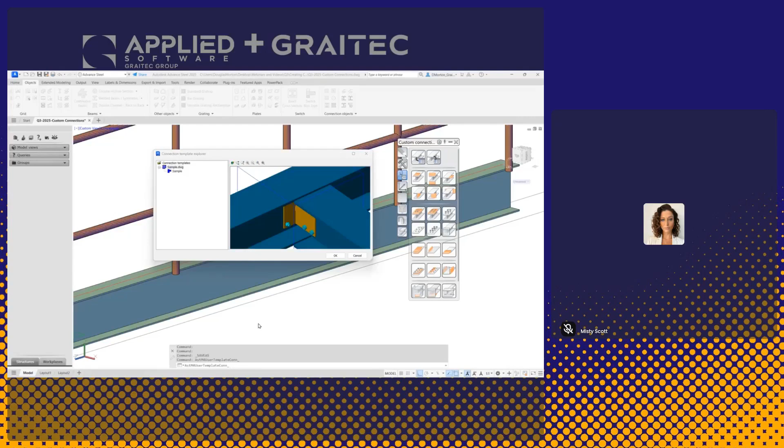We're going to take a look at how we can create a custom connection. The custom connection itself is found on your tool palette, which if you need to open that up, you go to the Home tab. It's right here, Advance Steel Tool Palette. If you come down to the third category on the side, you'll see Custom Connection. And we're going to look at how to create and use a custom connection.

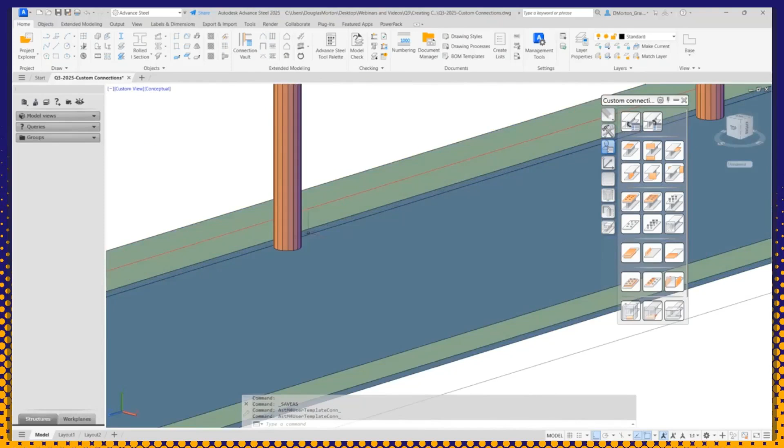To start off with, I'm going to build something similar to this. I'll show you how I did it. And then we're going to turn that into a connection. So I'll take this one here, and I'm going to start by going to 2D wireframe.

I want to build the sleeve that this is going to go into. So I'm just going to draw that in. Circular hollow section. I'll pick a point. I want it to go up, and I'll make it 6 inches long. That'll come in. I pick the size that I want for my sleeve.

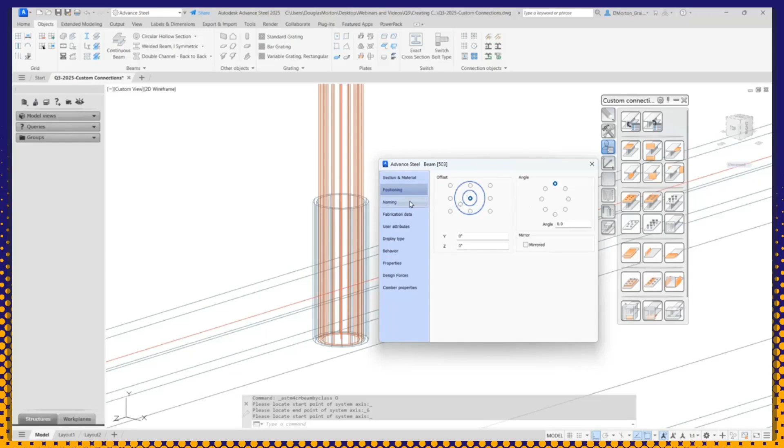Okay. Any other variables I need to set, and let's see, they have a railing pipe connection. That's good enough. So we'll put our information in. We have our part there.

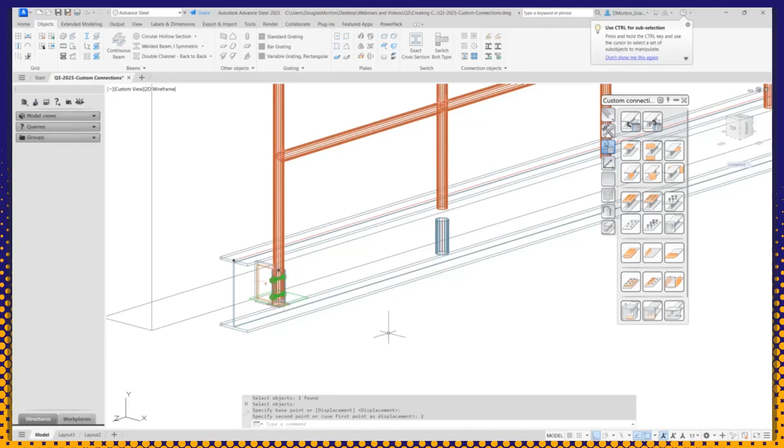Now I need to move this down a bit, so I'm going to move this down, let's say 10 inches. See if that's the right height. That's probably too much, so we'll move it back up a bit. Let's say 2 inches there. Yeah, good enough. So now I have my sleeve down underneath the flange, and I want my rail to come into that. So we're going to continue to build this.

I want to have a plate that comes off of this going to the web of the beam. So I can come into here and I can use, in the custom connection area, they have tools for plates. Now, whenever you're creating a custom connection, it's probably better to use the plate tools from here if you can, or the tools that they provide here if you can, simply because these tend to have a reference point and they tend to be more dynamic if things get changed.

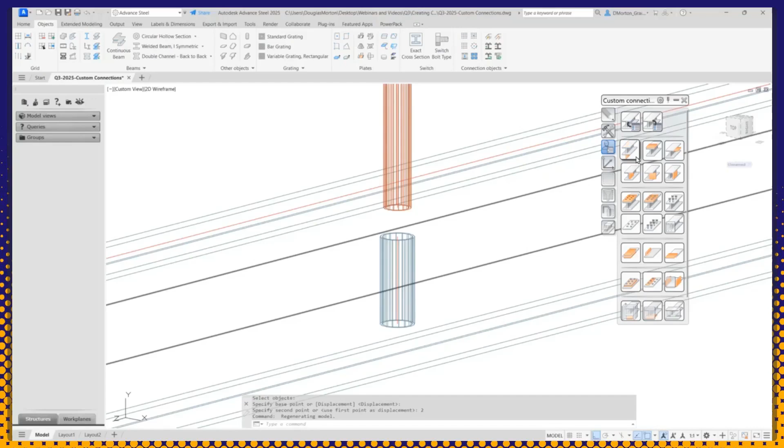So I'm going to select the plate here and pick the sleeve that I just created. It says, do you want to select a reference point? Yes or no? So I'll say yes. I'll just pick the center point at the top here. That's fine. That'll be my reference point.

Now, if you don't, it's not the end of the world. You have the ability to go in here and you can say, I want the main system line or main physical line to be my reference. It'll work just the same.

At this point here, I want this not to be parallel, but perpendicular. And I need it to go towards the actual shape itself, towards the beam itself. So you can see it's going to come off one side or the other side. So what I'm probably going to have to do here is just rotate this 90 degrees one way or the other. So it's looking at the orientation of my shape and basing it off of that. Okay, so if it doesn't line up initially the direction that I want, one side or the other side, I can always rotate the main shape that I'm attaching to, and then it'll come out this way.

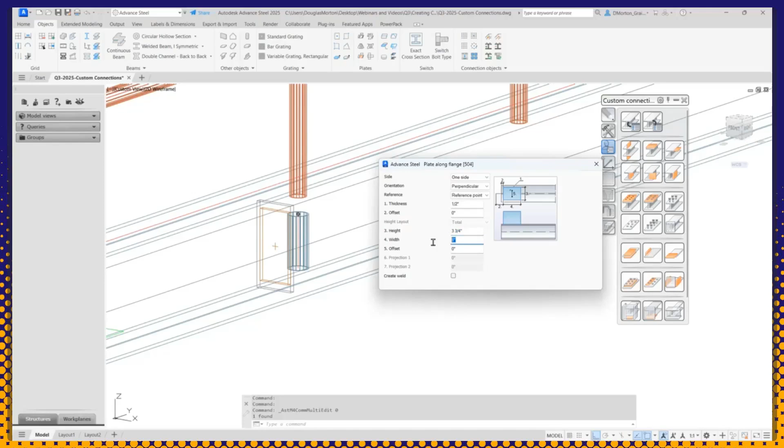I'll go back into the settings for that plate. I'm going to make this height 3 3/4, and make it towards the web, then make the width 6 inches. So that gives me the plate going in towards that beam.

I can set the thickness to something else if I want. I have the ability to come in here and create a weld that'll weld the two pieces together, the plate with the sleeve here. I also need to add a weld on the other side, but that's not going to be part of this menu.

But you have other controls in here as well with an offset. Depending on what tool you select from the custom connection area, you'll get different variables and different tools that allow you to set up that object.

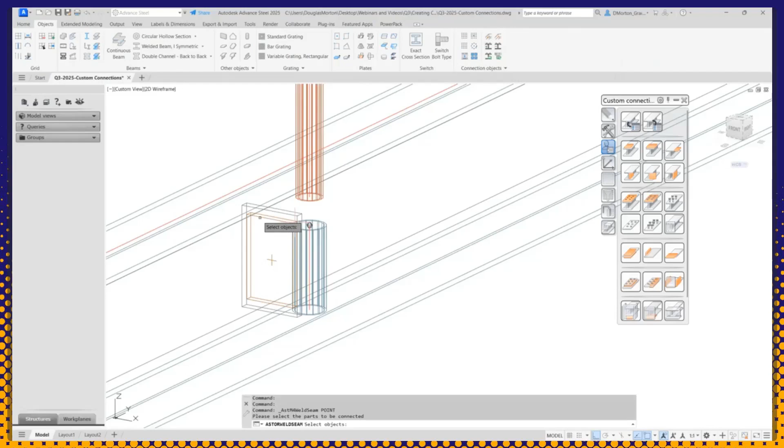So I'm going to come here and just add in a weld. I'll take a weld, and say I want to weld that plate to that beam. I'm just going to put it on the inside near the middle, shop, and continue this all around. I can set notes, do whatever I need to, and that's just from the weld command from the objects tab.

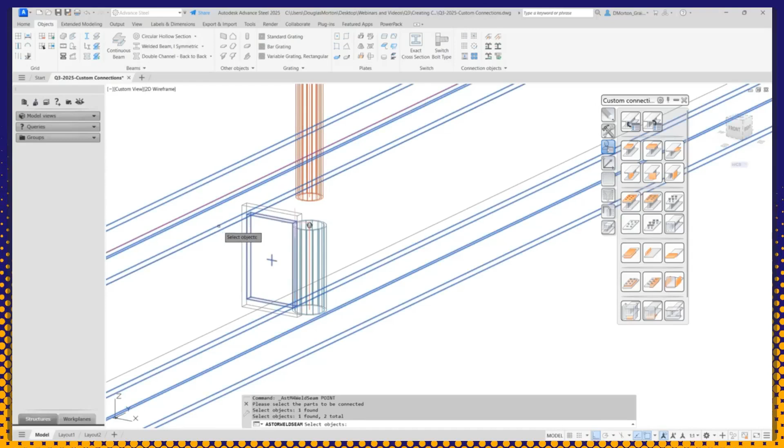So it's going to recognize those two parts if I select them both. I'll pick both like that, then pick the weld, and say what I want it to be.

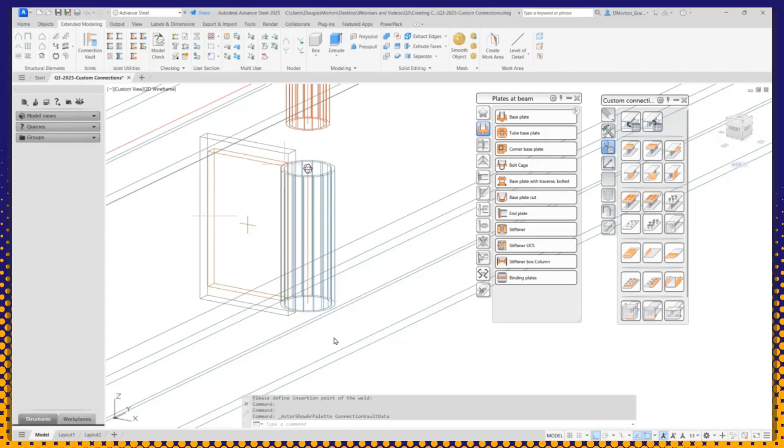At the same time, I want to put a cap plate at the bottom. So I'm going to come down here and use my connection vault. Yes, we are creating a connection, but connections can be part of the connection - that's not a problem. So I'll come into here and say I want to place an end plate near the bottom.

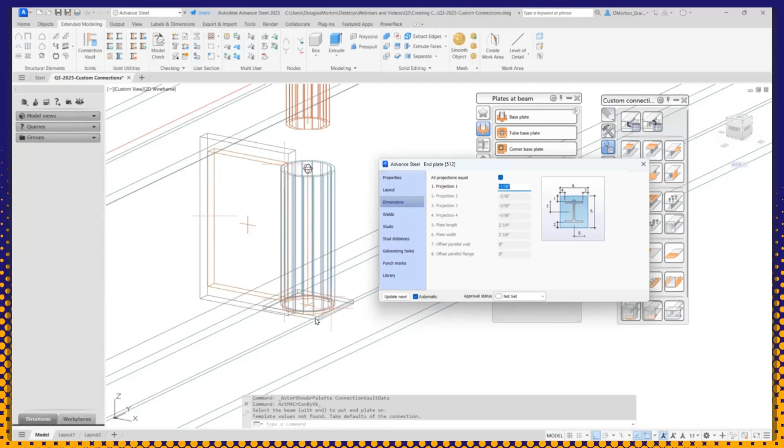I'll just go quickly through this. I don't want it to be 1/2 inch, let's make it a little bit thinner. And I want it to be round. Okay, the dimensions - maybe I'll pull it in by 1/16 of an inch, so that way if we're welding it, it has a place to grab to, and we're good. Okay, so there's my cap plate.

I can also extend the pipe down now. So what I need to do in the dialog for the handrail - if I have no connection here, I can't extend it, but I can still use my tools here, and that can be part of my connection.

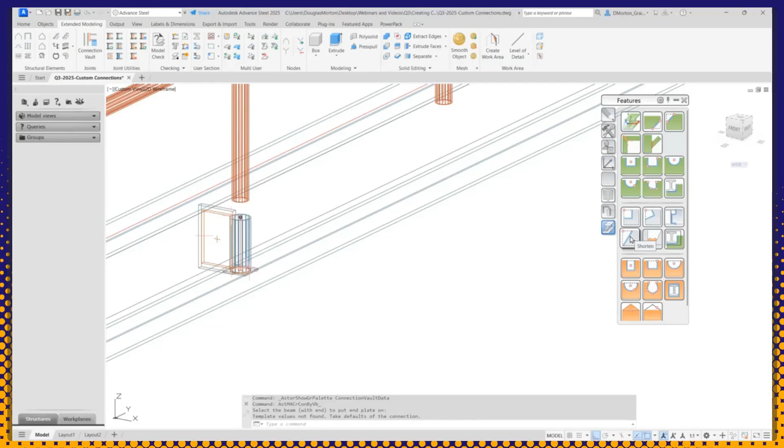So I can use my feature cuts from my tool palette, use the shorten command on the handrail, and then set it to a negative value so that it lengthens it rather than shortens it. You can see I pushed it down 7 inches so that it's now inside the pipe, or inside the sleeve rather, and it's going through there.

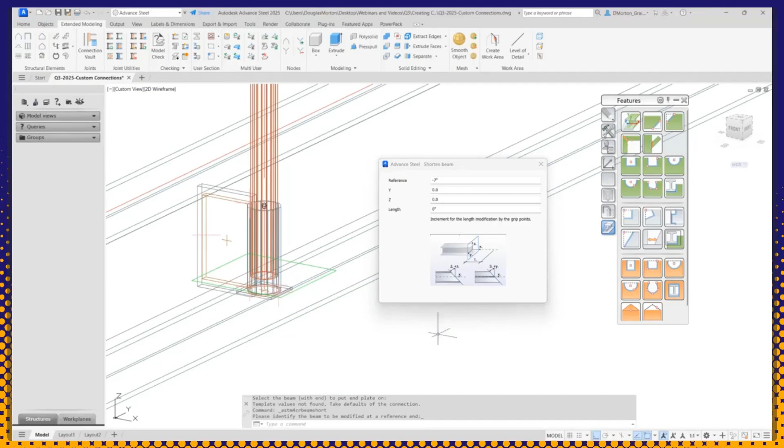From here, I want to put some bolts. So I can come back to my Objects tab, make sure my switch is set to bolt. I'm just going to take the rectangular center point one, and pick both the sleeve and the pipe, then put it right in the middle of that sleeve there. You can see I have my UCS set the wrong direction, so I'll just go back, rotate around the X, and then do it again.

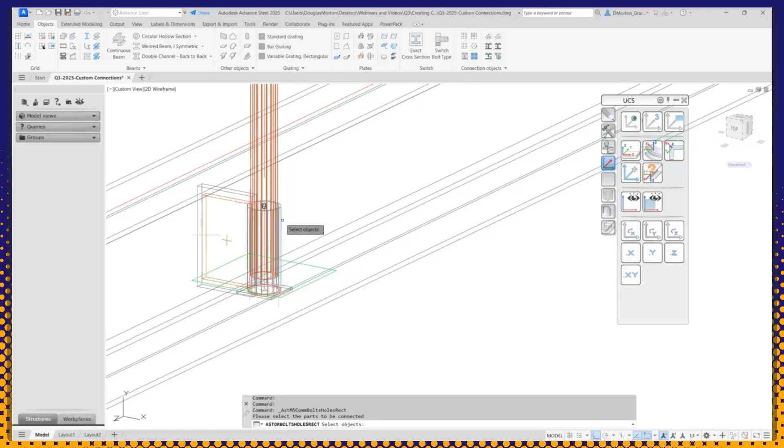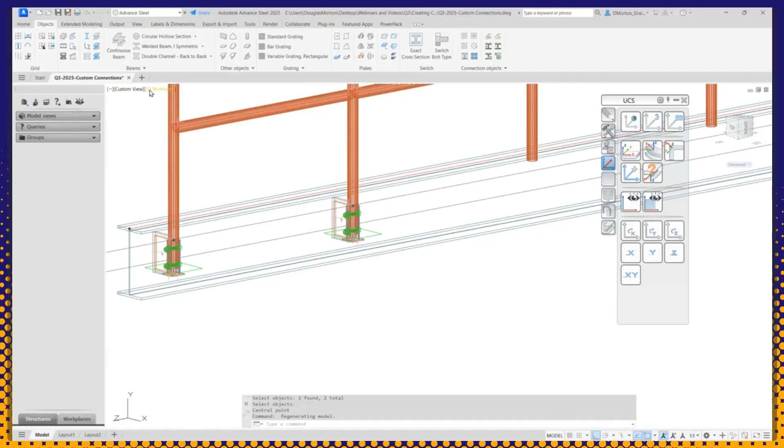Now, once you have everything in place, just double check and make sure it's the way that you want it. So let's say I have my plates being fastened to the side there. I've got the bolts going through both the sleeve and the handrail. I've got the cap plate at the bottom. Let's say this is a connection that I want.

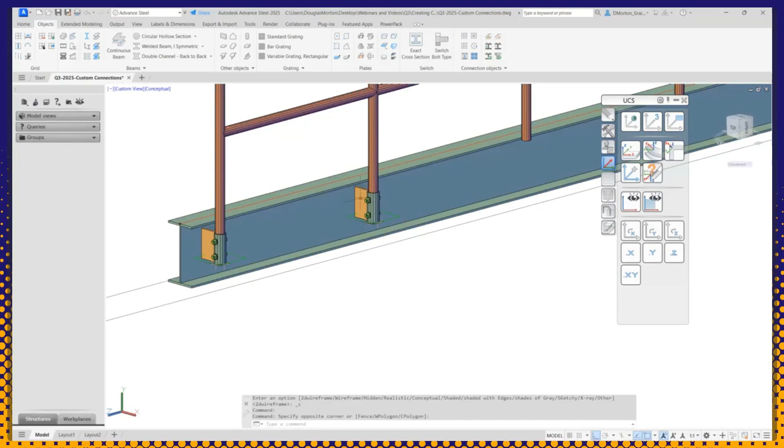How do I create the actual custom connection now that I can use over and over again? You don't have to, but you can create different connections if you want - maybe I wanted 3 bolts, maybe I wanted 1 bolt, maybe I want a different plate. I can just continue and make a whole bunch of them in the same drawing. That's not a problem, but I would create different connections for each. So what I'm about to do here, I would create a different connection.

Right, I would just come up here, and on my tool palette, that third category down, you're going to see you have custom connections. The very first button is going to be to create a custom connection. Click on that. You require shapes in order for this to work. There's no other way to do this.

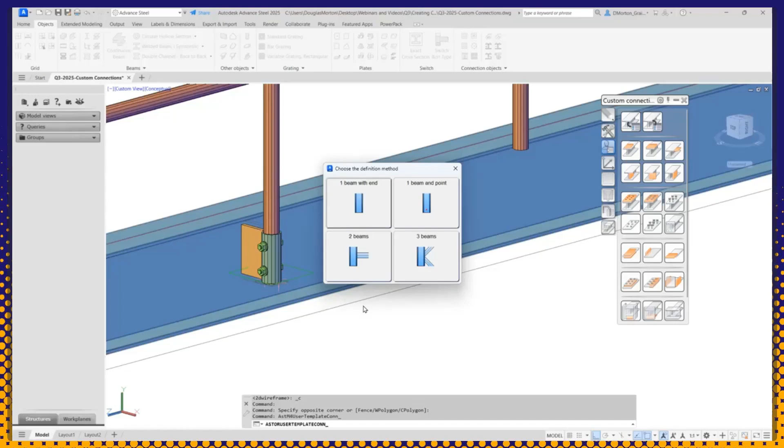So I'm going to come in here and say, am I attaching this just to one beam? No, I'm not. I'm actually attaching it to the beam and the post. So I want these two as my main parts so that whenever I want to place this connection, I have to select those main parts. Okay, so I have to pick two beams.

This would be what I want for my first one. Select the beam going across, then select the post, and right click. You're going to see this dialog comes up, and we're just going to fill this out from top to bottom.

The name area in here, this is going to be, for example, rail by side connection 1, if you want. Call it whatever you like.

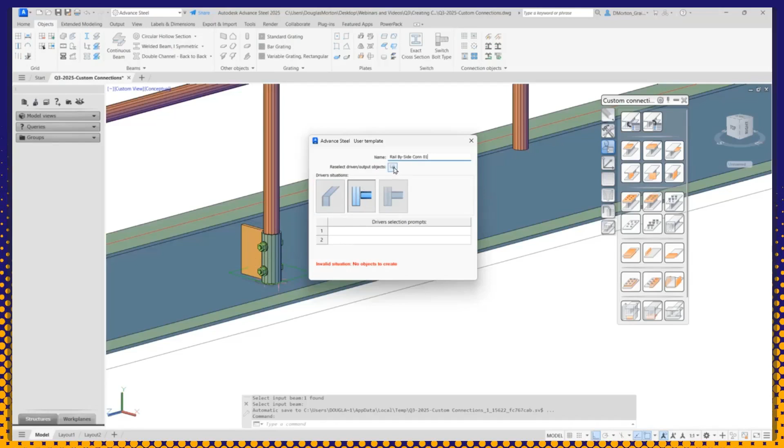Select the parts. Now you want to make sure that everything's showing, your welds and your feature cuts and stuff like that. You want to make sure everything's there visible so you can grab them. So you're just going to say reselect the output objects. You don't have to do the beam and the post, so you can just go around the objects that are added into that connection, and it'll pick those items.

And right click. You'll notice that the minute you reselect objects, the items you've selected, you end up getting a connection box, a blue box around it.

You then need to decide what kind of situation is taking place. Do we have beams that are going end to end or shapes end to end? No, that's not the case. Are they going flush, one right up against the other one? They're not. This says it's coming into it, but it's not touching it. It stops at the flange edge, which will work in this situation here.

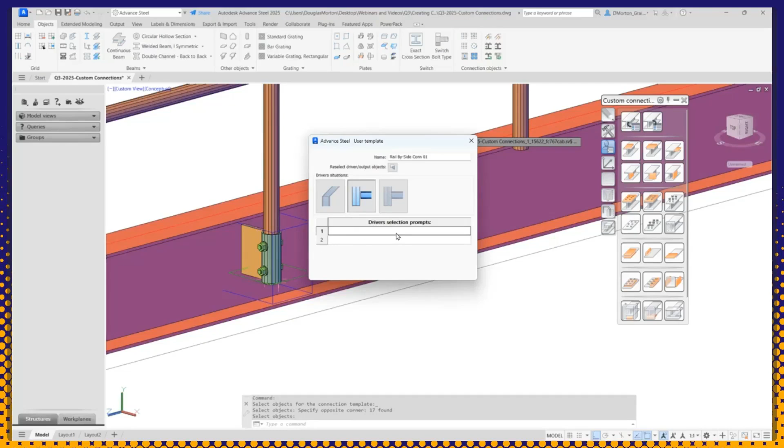Then we're going to fill out the bottom. You notice when I click on that first box, the beam turns red, and it just wants you to describe what this is. So I'm going to say beam, and then I'll come to the second one here and say post.

So that describes the post. So now when it prompts me to select my objects, it'll say, please select your beam, please select your post. There is no save or apply. Once you finish filling everything out, you can close it.

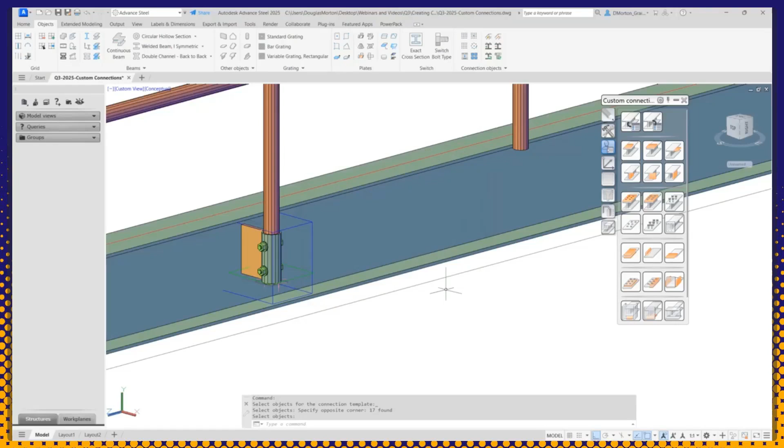The key to this, however, is after you've selected your objects and you see that blue box again, you can do another connection here, another one here, or you can go create other connections off to the side. It's not a problem. You can have as many as you want in the one DWG file. But when you're done, you're going to save it to a specific location.

So I'm going to start off by coming into here. I'll do save as, and I'm going to navigate to my drive C. I'm going to go down to program data. This is a hidden folder in Windows. If you don't see it, it's because it's hidden. You have Autodesk, the version of Advance Steel you're using, your localization.

And once you get into your localization, basically you're coming up to this point here: program data, Autodesk, your version of Advance Steel, the localization you're using. Now you're going to go to shared, and you'll see there's a folder called connection templates.

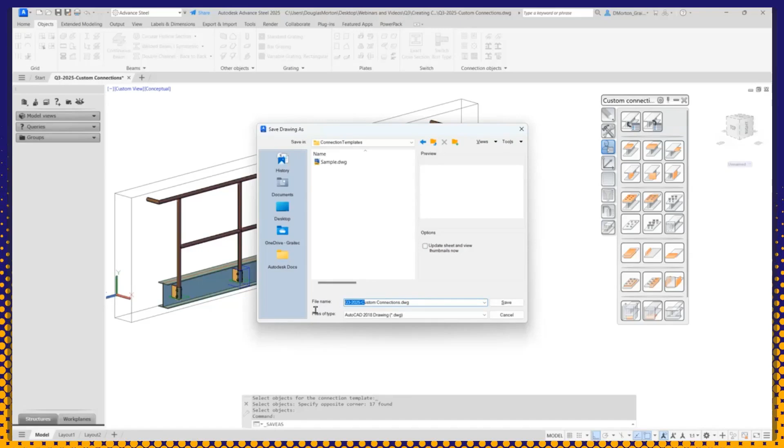Go into there, and you're going to say, what is the name of this connection template, right? So in here, I'm just going to put, whatever, I'll call it, give it a name. Custom connections, it's good enough. Save.

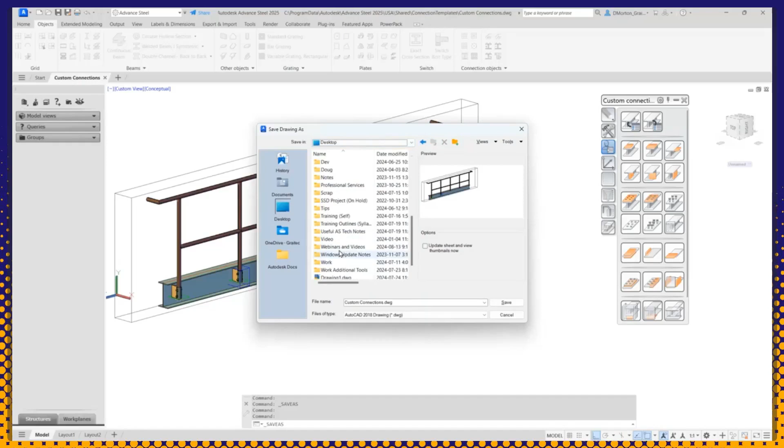Now, because that's saved there, anytime we go and we want to use it now, I'll just save it again in a different place. We'll get rid of it. So I'll show you, let's see, desktop. I have my work done here. I'm just going to go into that and save it here. So save.

I can get rid of these elements now if I want. I'm just going to get rid of the connection—actually, it's not a connection yet, but you can do that and get rid of it. You can see I have nothing connecting that handrail to the side. But I can come into custom connections, same place as before, my tool palette, third category down.

When I come up here, I have the ability to use the insert connection template. If you've saved this to the connection templates folder that we looked at before, inside where you have the program installed, then any connections you have in that DWG will be listed here. And there's the one that we just created.

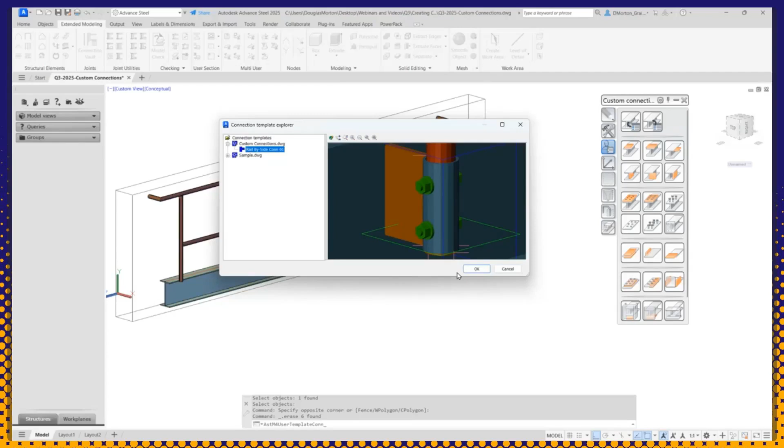I'll say OK. You'll notice the tooltip right away says select the beam, so I'm going to pick the beam. Then it says select the post, and I'll pick the post. And it places that connection in.

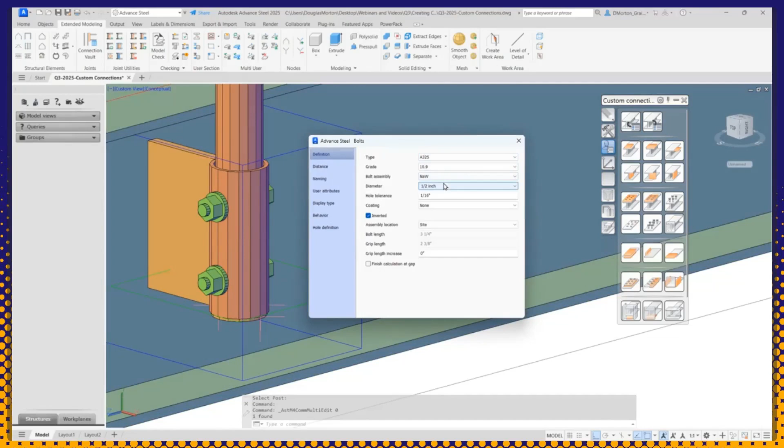I can allow object modification, which means that now I can actually go in and adjust things. So maybe I didn't want a 1/2-inch bolt, or maybe I didn't want an A325, or I wanted something else—I can go make changes to that. I can select my cap plate, and here there's my joint properties for my cap plate. So even though it's a custom connection, I can still make changes to the elements that are in it.

So if I've used bolts or welds or cap plates or anything else, I can still make changes to it. If the parts are drawn manually, I could adjust those as well.

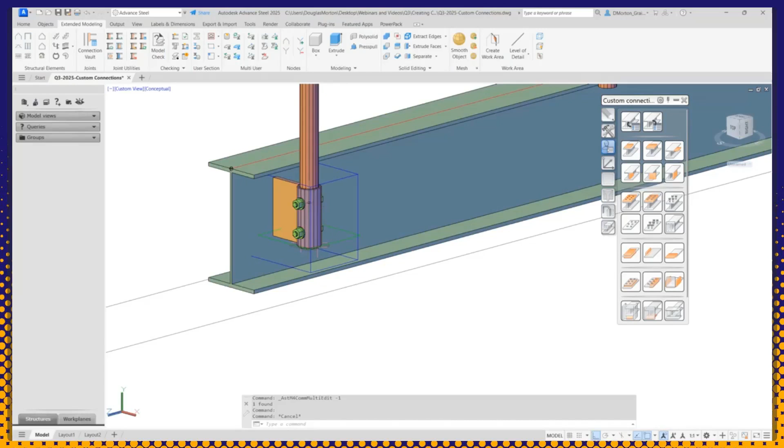This sleeve, this connection here, if I want to use it on the rest of them, it's used similar to a regular or standard connection. So you can go in and use your connection tools. You'll see they have the standard connection tools where if I wanted to copy or create a similar one, I could come in and grab that, pick my connection.

Right click, I'll take the beam and the post, and you can see it's going to put it on there. There's no box, only because it's a refresh issue. So if I refresh the view all, basically the box will come in, and I have that connection there.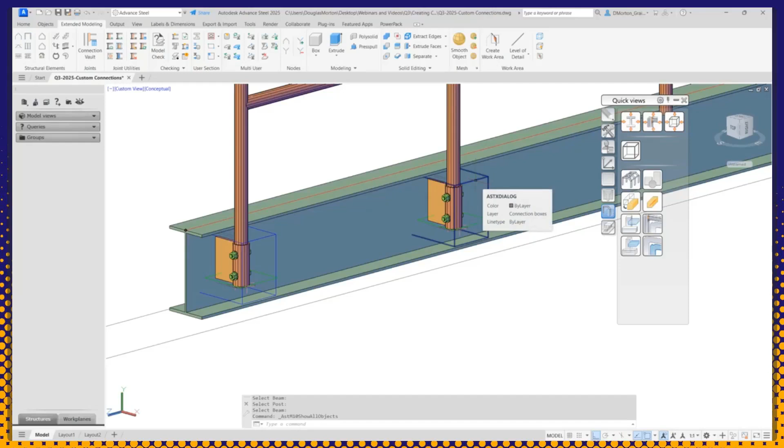So I can use my connection copy tools to bring them across. Let me get rid of that.

I also have the option to use the other one, where it's a joint connection. So let's say I want to do all the rest of these handrails. I can select that, pick my connection, right click, pick my beam, right click, and then select all my other posts, right click. You'll notice that it copies them all down the line.

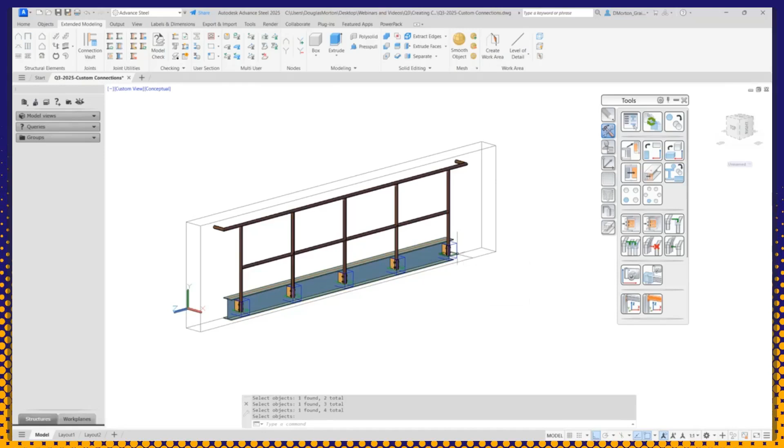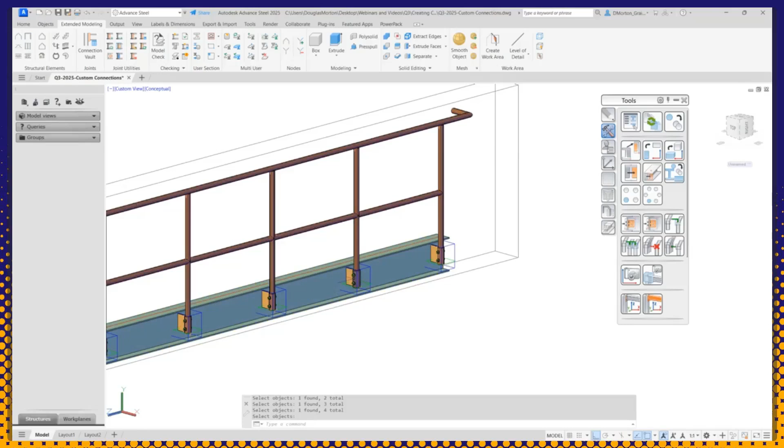Now, in some cases, depending on the handrail, you may notice that the final post is rotated. If you do, just don't put the connection on there. You have two choices: you can go in and create a new connection, one for left, one for right—that'll work. Or you can do all of them as a joint connection and then just do this one separately.

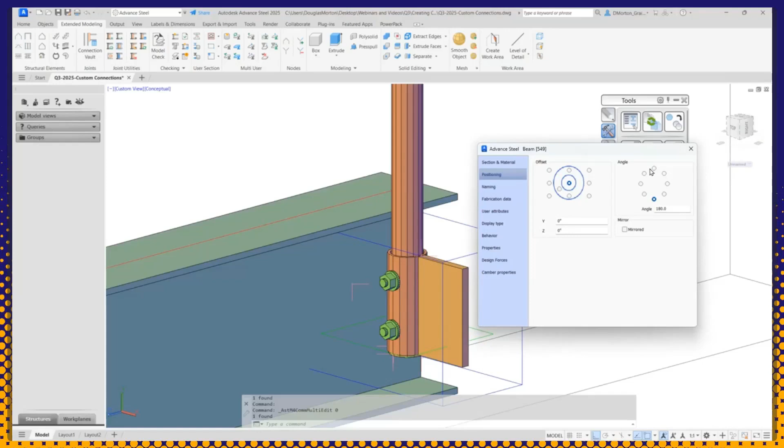When you go into here, that's going to be a primary connection, but you can allow object modification on that separate one. Then you just come in—don't forget you have access to everything—and you can change the positioning of that connection to the other side. So you can rotate that part that the plate is attached to on the other side, and you should be good to go. Just be aware of your weld.

Make sure that it's welded up properly. But that gives you the ability to rotate your connection after the fact, depending on what you've attached and how you've attached it.

You're also going to notice that in this case, I made these a joint connection, so if I do that to the one, they all get affected at the same time. So the joint connection works—it creates that joint connection and allows you to modify several connections at the same time.

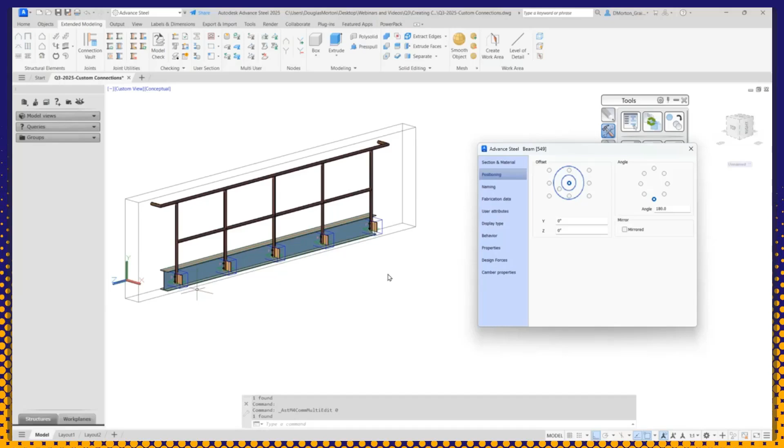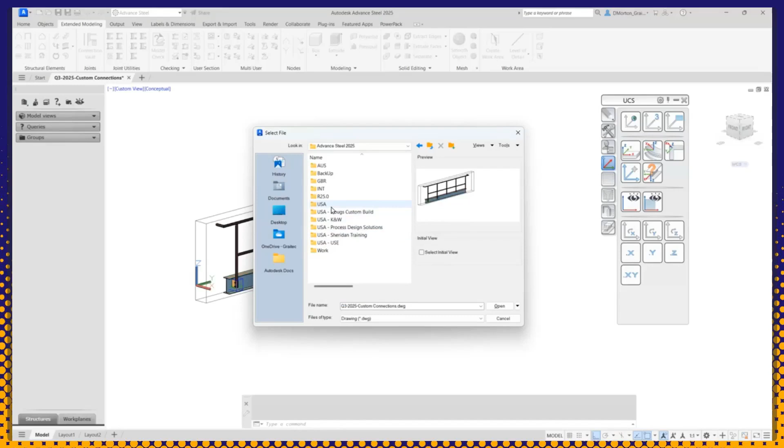I'm just going to go back now. I'm going to reset my UCS here and go back into the one that I created before. That's being saved on drive C, program data, Autodesk, Advance Steel, USA, shared, and connection templates. I'm going to open up the original one here.

I'm going to create a different type of connection just to the side quickly so we can see a column and a beam as an example.

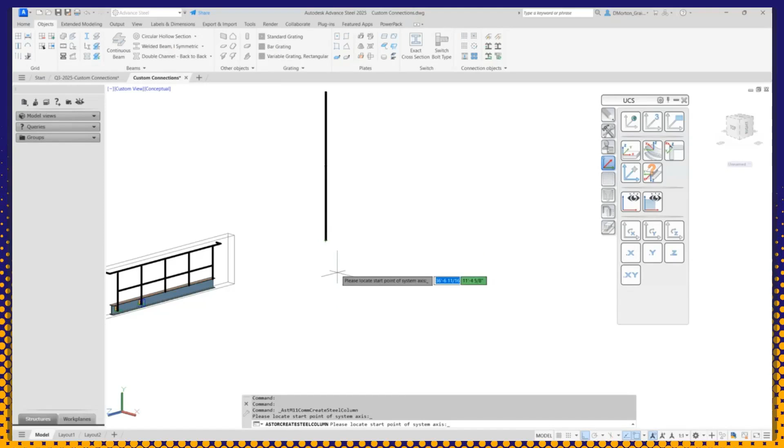So if I come in here and I place a column, I'll put that off to the side, and I'm in the same drawing, same DWG. I'll change the shape to, let's say, I-section, W shape, and the default's usually a 12 by 26. We'll use that, that's fine.

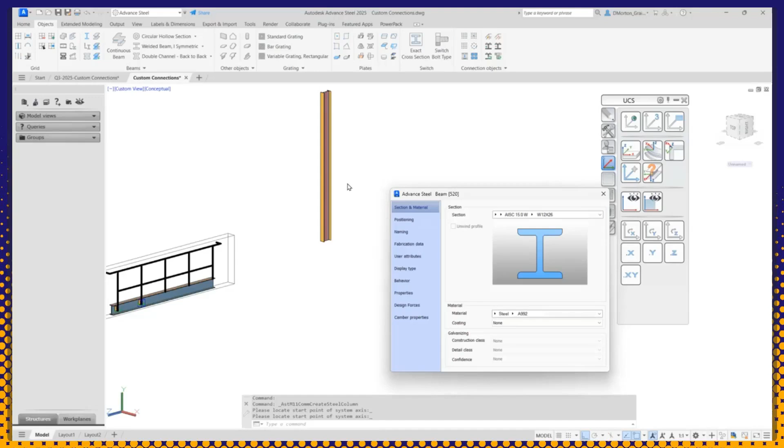So I have my column here, and I can set that however I want, whether it's facing the web or facing the flange sticking out, and then I can build off of that. The one important thing about this is that you build it the way you would typically build it. So if I'm putting the column in by center, so I have that system line in the center, then when I'm making the custom connection, I should do the same thing.

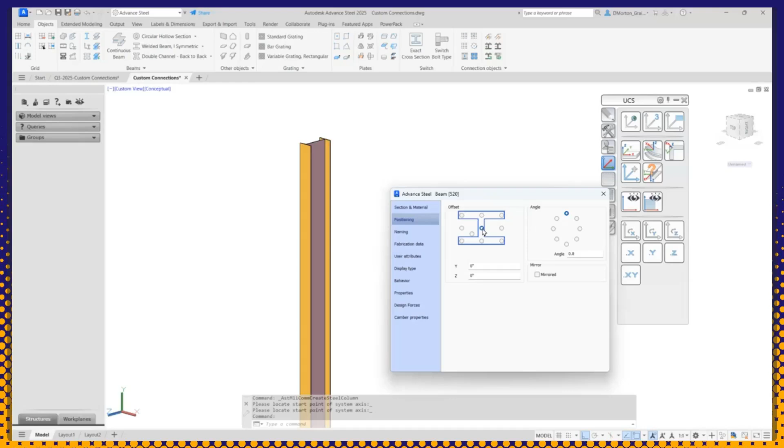Otherwise, when you go to place it, it may not come out properly. So if you're doing beams by top of steel, make sure you put the beam by top of steel. If you're doing columns by center, put the columns by center. Not doing that and then trying to use the connection can cause issues. Just make sure you're inserting the shapes the way you normally would, especially your main members.

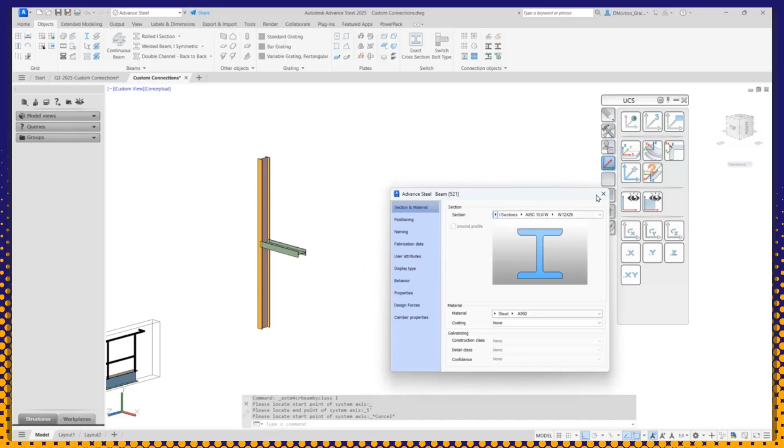Okay, I'm going to close that. I'll come back and do another one here, just going to draw in a beam coming off of it, like this. I'll put this as, I don't know, 5 feet. My UCS is rotated, so I'll do it again, just put it in properly.

And I'll grab that center point just to make it easy. Do 5 feet, and there I have a beam coming up. Now I want to connect this up.

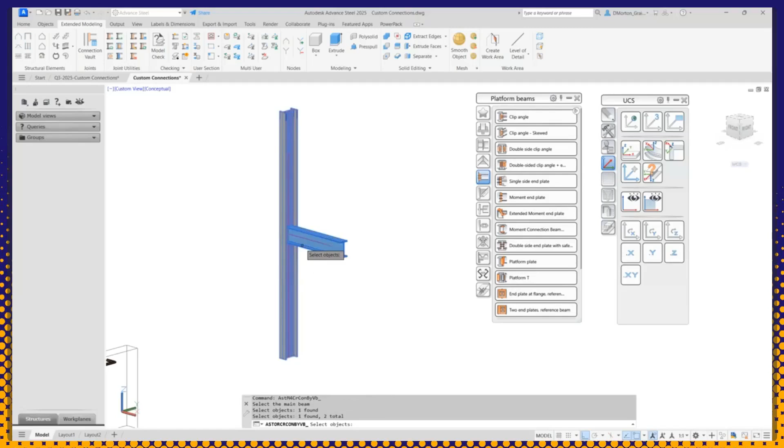Okay, I'm going to set this up, create my shapes. These are going to be my main elements. Now I'm going to use a couple of out-of-the-box connections again, let's say a clip angle. I'll select the column and then the beam, and I'll place a clip angle, just using the defaults. So I have a clip angle here.

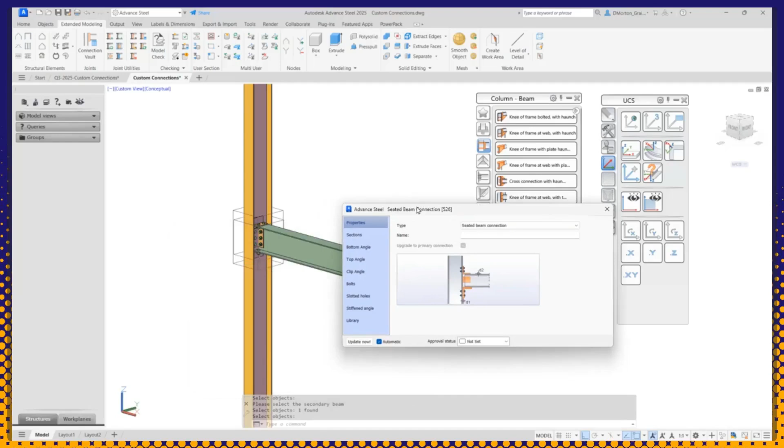Maybe I want that to be seated, so I can do a seated beam connection. Again, column, beam, and it's going to place that seated connection in. If I want it bolted through the top, I can do that. If I don't, I can say bottom angle through secondary, and the top angle through secondary as well. You can set this up so you have your seated connections however you want.

You have your clip angles however you want. You go and set the connections in, and it's very quick and easy that way. Maybe this is all you do and you just want to have it the same way every single time. You can set that connection up once and then go and use your custom connection.

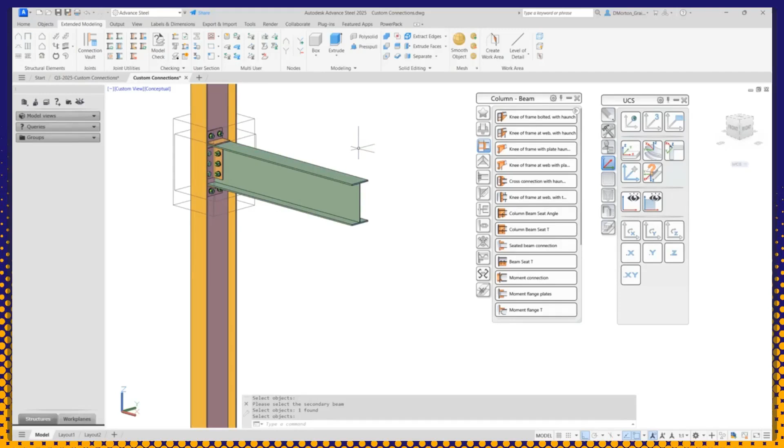I'm going to do a little bit more though. I'm going to put, let's say I have a pipe or something coming through here, so let's make a modification. There's an opening, I'll go like that, and here I'll come off of that a little bit, keep snapping the other way. I'm going to go to the wireframe to make it easier.

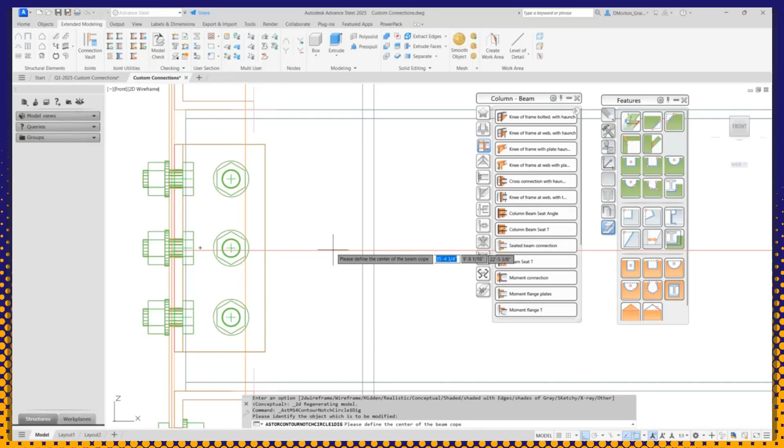I want to modify the beam. I'm going to come off of this, let's say from the center of the plate, a little bit. It's still going the wrong way. Okay, I'll do a line here. Oh, it's the UCS, that's why. Okay, try again.

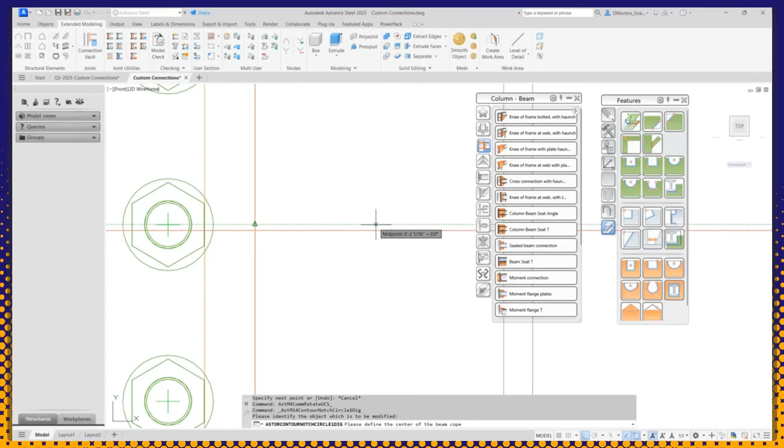There we go, now I'm getting my tracking 6 inches over. We'll make that 2 inches round or something, and there we have an opening.

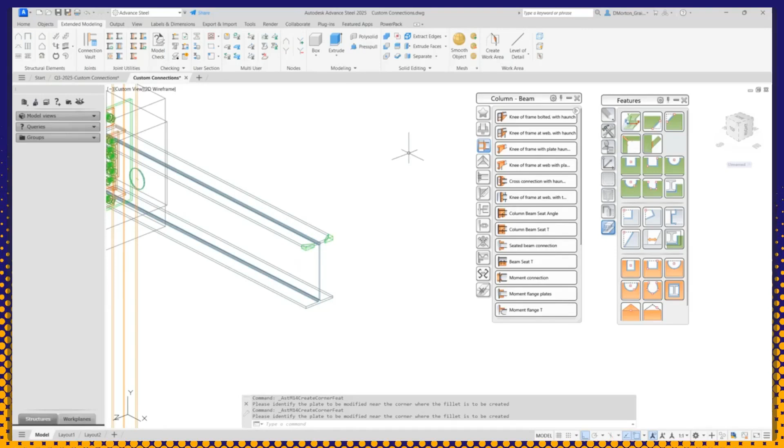I can come in, maybe I want to have some corner work done at the top or something, you know, I can chamfer the corners or whatever the case may be. I want to put a plate underneath here. I'm going to add a regular plate so you can see how this works and what the difference is. Let me just come into here, I'll reset it, there we go.

Now I can draw my plate, so I'll just do a regular plate here. I'll come in and do a nearest to the other side.

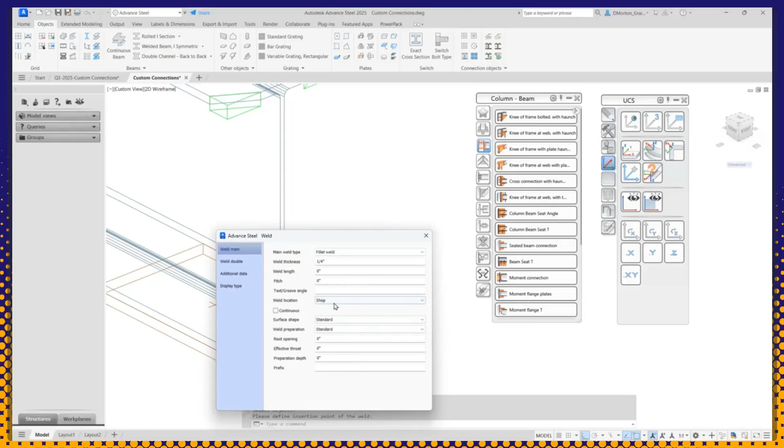And I'll put that like that so it's sitting underneath. I'll even weld it together here. So now I've got a weld, shop welded. And I'm going to put the regular custom connection plate that I was talking about before under there.

So I'll just pick that, I'll select my beam. Do I want to have a reference point? I can if I want. I can put it, let's say I want the top point here or something like that. I'll put it to the other side, so it's at the bottom, and I'll move it back a bit. So let's offset that by, I don't know, 8 inches or so, maybe a little more. 12, there we go. Okay. So that gives us...

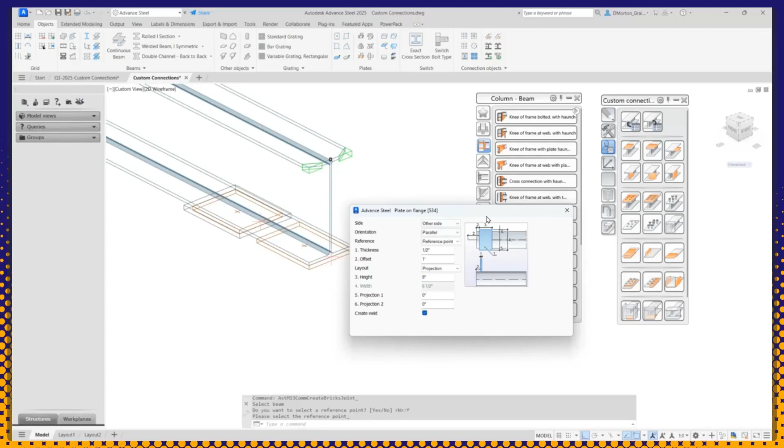A plate underneath, and I'll weld that one too. So one of these plates is drawn in manually, and one of them is using a custom connection.

Let's make a quick connection out of this. I'll create - again, it's 2 beams in this case. So just pick the parts that are the main parts that are always going to be there when you start. Column, beam, give it a name, right? Column, beam. Select the parts. So again, I'm just going to come across like that, pick all my parts.

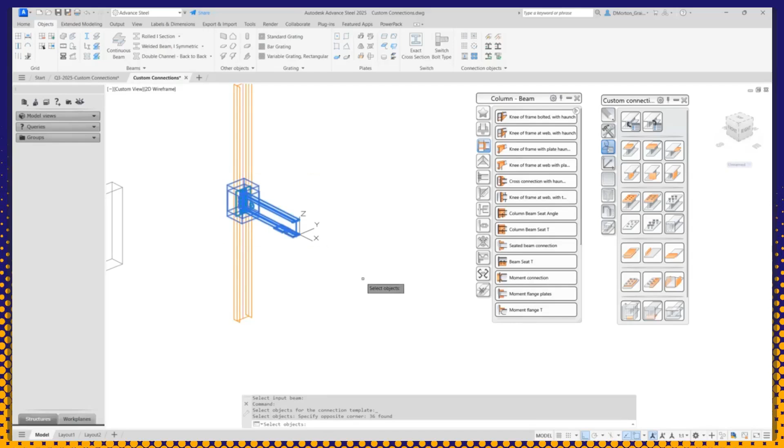And I get my blue box. In this case, I do want it coming flush to the other piece. My beam comes right in. I'll highlight that and say this is going to be the column, and highlight that. You can see that's the beam.

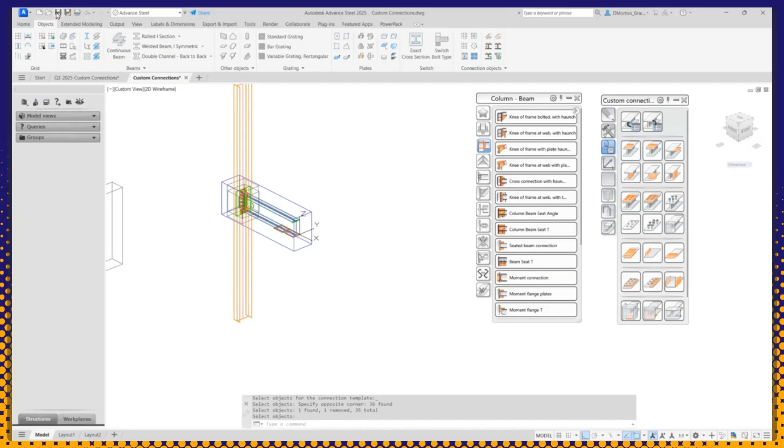Close it, save it. Now, this is already in the proper folder. We opened up the file from that folder. So I'm going to close that, and then I'll just place in a column and a beam here. We can see, now that I have that standard template, anytime I start a new drawing, I'm going to have the option now to add that in.

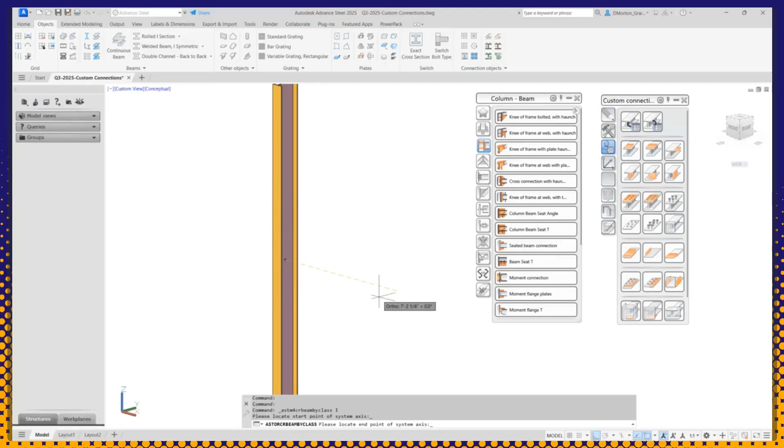So there's my column. I'll pick a beam, pull it out. And there's my beam. If I place in the connection on here, I'll just use this. Oops, I haven't finished with the beam. So there's my - see, it's added it in here now.

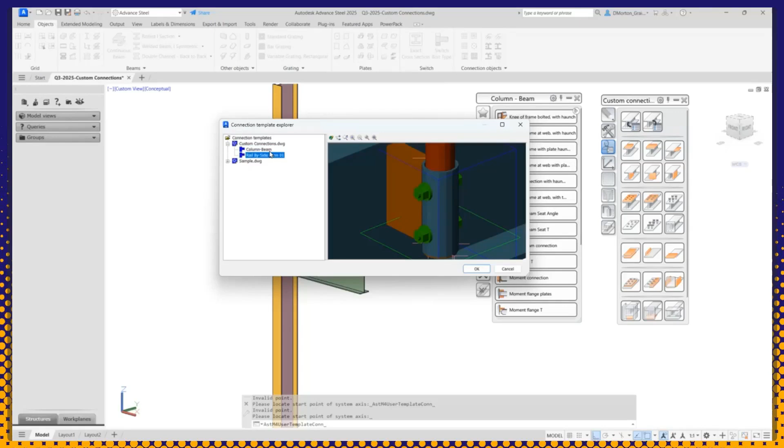In the list, I have that connection available. I still have the other one. They're both in the same drawing. So that's why they're in the same section. So column beam, say OK.

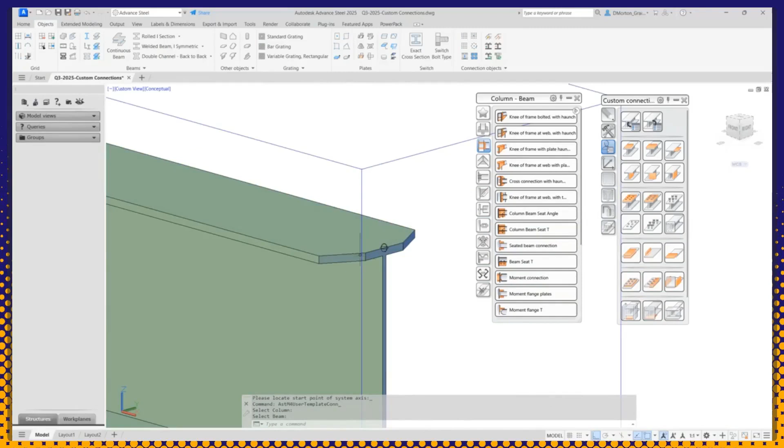Select column, select beam. Allow modifications if I want - I don't have to, but put that in. But you can see in here now, it's done the clip angle, the seated connection. It's done the opening, the modifications there, the modifications on the corner for me. It's got my 2 plates underneath.

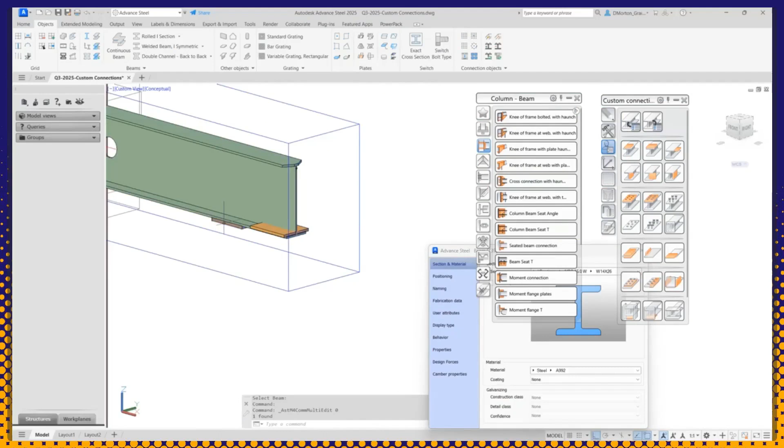But what happens if this is not a 12 by 26? Maybe it's a 14 by 26. Well, you'll notice when I make the beam a different size, the plate that was used from the custom connections actually adjusts automatically with that beam size, whereas the one that I drew manually does not.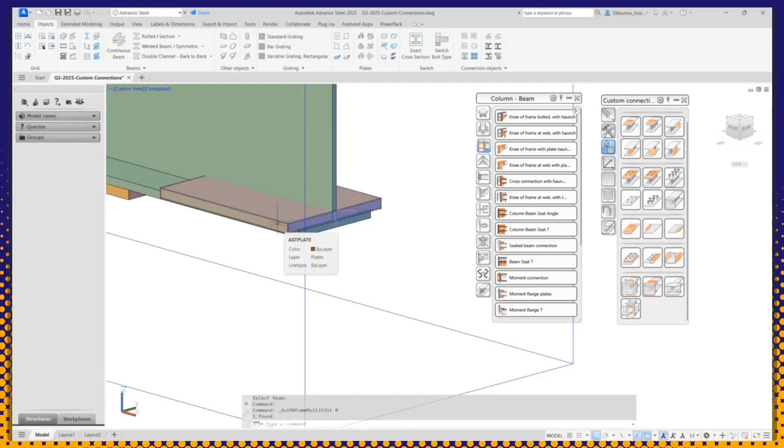All right, so one of the reasons why you want to use the tools from here instead of drawing them manually, if you can, if the tool exists here, use it from here - is because it'll place a reference, and you'll see a lot of these are for plates because plates don't get a reference point typically. And so when I change the beam size, or go to a different beam size, that plate does not adjust with it. Whereas if I use it from the custom connections, you can see that it will adjust with it.

All right, so this gives us just kind of a couple of examples of where we can go in and use a custom connection. We can, again, do a handrail connection if we wanted to. You can see I just pick the beam and the post, and then I can copy those connections.

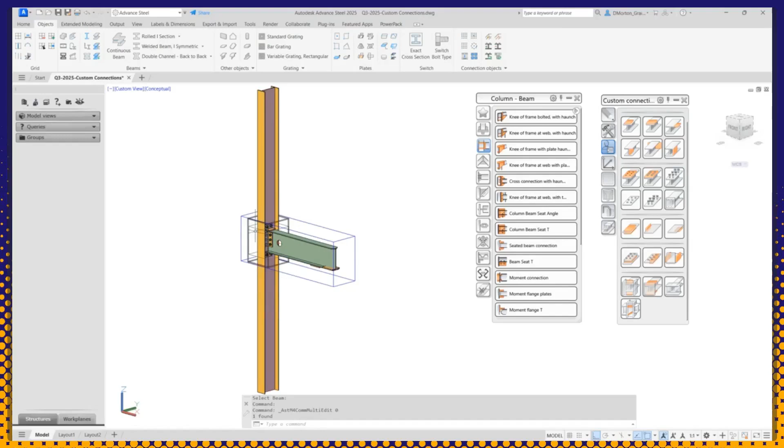The same thing holds true. I can do a column and a beam together, create a connection, and then just include those elements, place it in. And you always have access, if you want, after the fact, to go in and adjust them to whatever you need, right? So bolt parameters, vertical bolts, I only want 2.

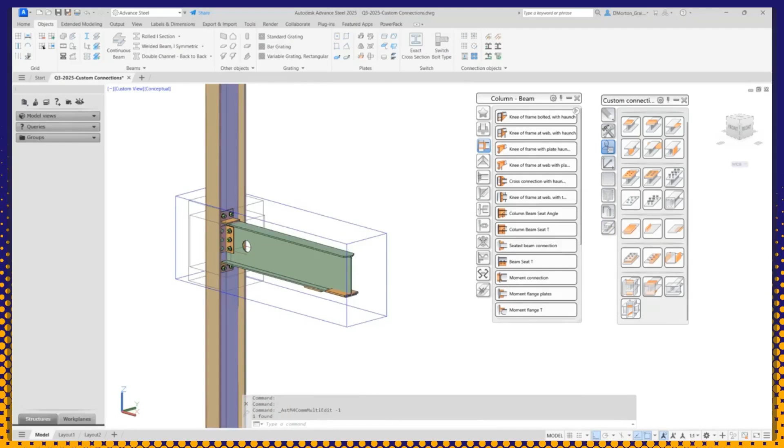You see, even though it's part of the custom connection, you can still use the connections that you originally used when making it. You have access to the feature cuts. You can resize the hole. You have access to the plates, to the objects that you've drawn manually.

You still get the grip points. You can readjust them. If you've drawn it using another tool from the custom connection, you can go in and change joint properties there if you want. You know, maybe I didn't want it on the bottom - I wanted it on both sides, or I wanted it on the top. I could adjust that as well.

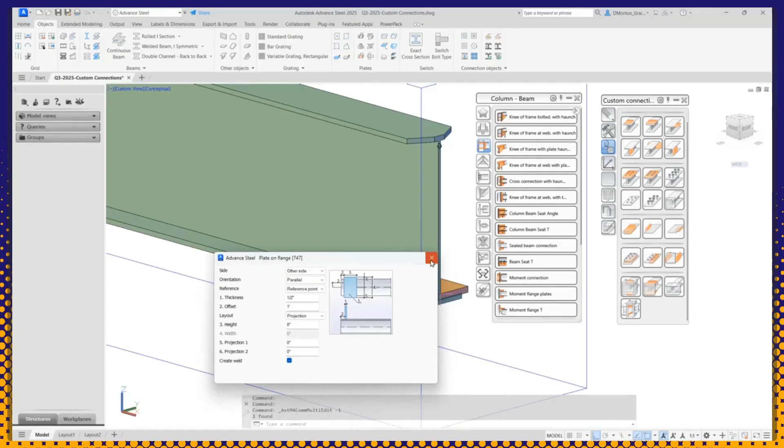So that is the custom connection, the basics on how you can use that. And that's pretty much all I have to show for today.